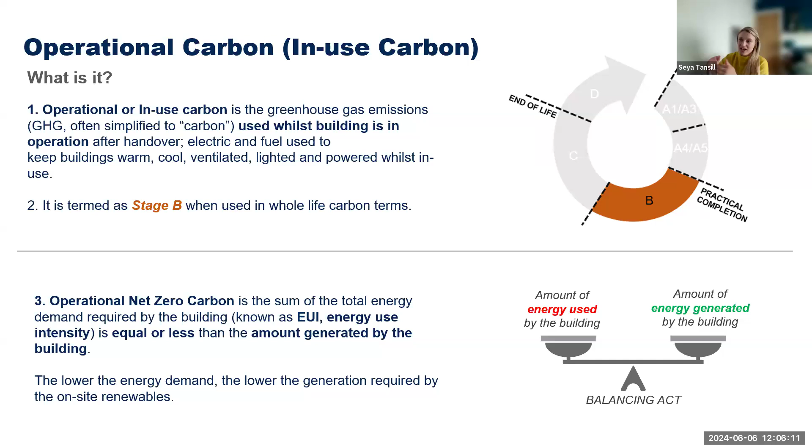So to start with, just to align terminology through the presentation so you understand where we are. As a reminder, operational carbon is everything, all the energy essentially that is used to fuel your home. When we talk around that from a whole life carbon perspective, that is described as stage B. That's exactly the same thing. And then just for absolute clarity, operational carbon is not a net zero carbon criteria. So operational net zero carbon is the balance of the energy used against the amount of energy generated by the building to reach the 0 point. And the different things which, again, I'll come on to.

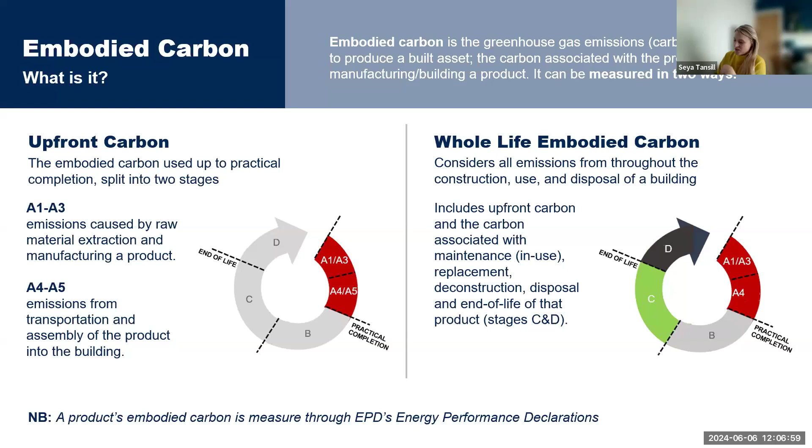Embodied carbon, which I will touch on at the end of this presentation, but as I understand in housing, it's not as predominant as it is in other sectors. But just for clarity of terminology, again, upfront carbon or embodied carbon is from raw extraction of the material right at the end to practical completion when a contractor hands over the building to yourselves. And from a whole life carbon perspective, there's stages C and D. C is the amount of energy used during the building's lifespan to replace and maintain products. And D is a circularity perspective. So is it recyclable? Does it get reused? So just a reminder on those.

To kick off, when you ask for an operational net zero carbon building, that could mean a number of things. Surprisingly, there is no consistent definition of what net zero carbon is. When I worked at BRE at that point in time, there were 9 different definitions out there that you could use for specification. So just putting operational net zero carbon into your briefs is not enough to really define what you're going to get as an outcome. So the first thing to do is decide what definition of net zero carbon we're going to use.

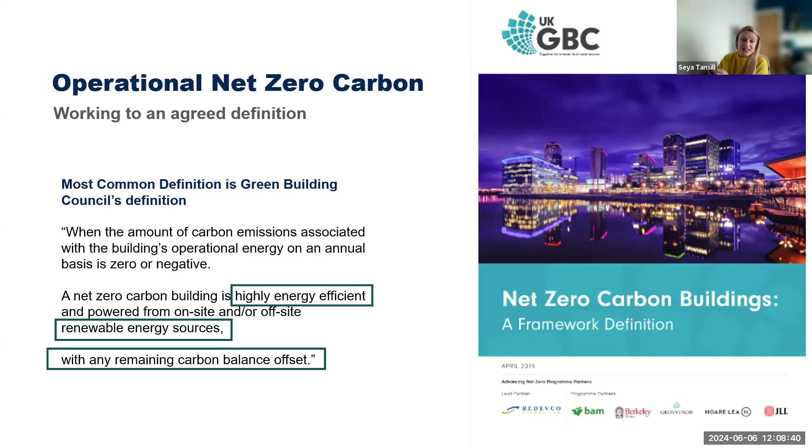What is a renewable energy resource, and offsetting and carbon balance, is also quite a contentious issue in the industry. So touching on those points in more detail as definition watch points would be really good to elaborate when you're setting your ER requirement for net zero carbon.

Highly energy efficient, I would presume that's fabric first. Surely that's fabric first with an efficient service design after it, because that's what the industry has been banging on about for a long time. However, with the development of grid decarbonisation and schemes - I won't name them - certain energy providers offer schemes where they will just offset all the energy with green energy from the grid, so that isn't necessarily taken for granted anymore.

So by referring to the Green Building Council's definition, you do inherently say that you're looking for a fabric first approach, because lower down in that document it provides a hierarchy of fabric first, services, renewable technology, and then offsetting. But to be absolutely clear, I would certainly prescribe how you want the highly energy efficient part of that definition to be achieved.

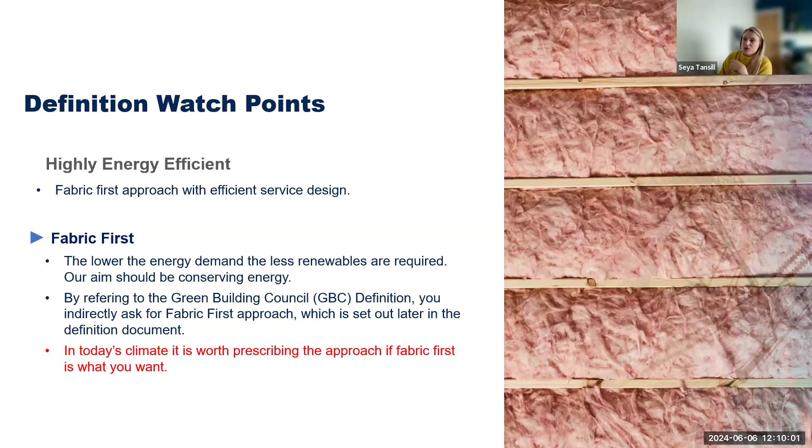Watch point number 2 is the renewable energy sources. As a company, it's definitely worth a discussion of how you want to treat grid decarbonisation moving forward, because this is going to get more and more of a contentious issue as more of the grid gets decarbonised. However, at the current point, I think we're about 40% decarbonised by the BEIS figures.

So technically 40% of the energy coming into any home is sourced from renewable energy. Do you want to capture that as part of the definition, to say that only 60% of the energy used needs to be balanced out with renewable energy sources to get us to zero? Or do you want to make them do the full 100%? That's only something your company can really decide on.

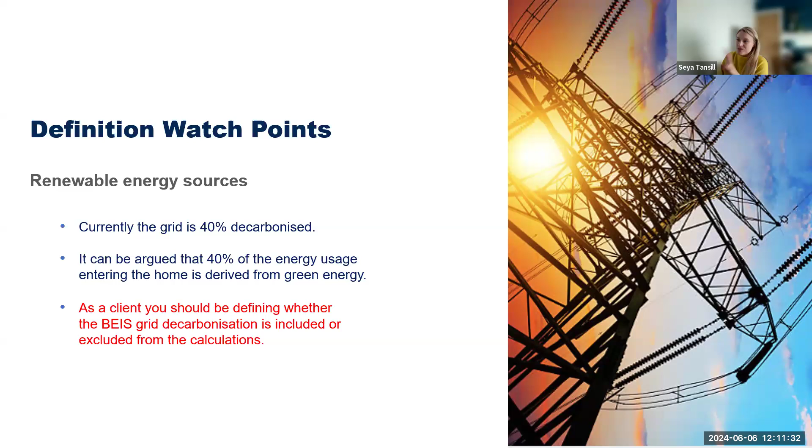As that gets a higher value, you'd probably have to look at that specification again. But without putting that into your employer's requirements as a specification, someone could potentially use that and get a 40% advantage on their calculations over someone else, meaning you're not getting a like-for-like comparison between your projects. So clarity on that is really important.

Offsetting, again, is a similar watch point to what I previously said. It has to be a company discussion and decision of how you want to treat it. The DFE, as a public sector body, and the DIO, and basically the public sector, have said that they want to use the Green Building Council's definition of net zero carbon, but without the ability to offset.

It's an easy out really for a lot of contractors. Carbon credits are cheap. Unverified carbon credits are even cheaper, and it's easier for them to offset at the moment than it is to actually provide you a net zero carbon building at handover, which is sad, and it also doesn't cover carbon in perpetuity, so it's a one-off payment essentially. Again, something you need to think about, but you certainly need to write into your definition if you don't want the majority of the energy being bought through offsets, then it needs to be clarified in the employer's requirements.

The other really key point is specifying that you want to have an operational net zero carbon building at handover. And this goes back to the grid decarbonisation factor. So if you don't specify at handover, an argument could be made towards the roadmap of grid decarbonisation to get you to net zero carbon at a point in time, which might be fine for your needs of your project. But if you don't want that, please make sure you put 'at handover' in your employer's requirements or in your net zero carbon definition.

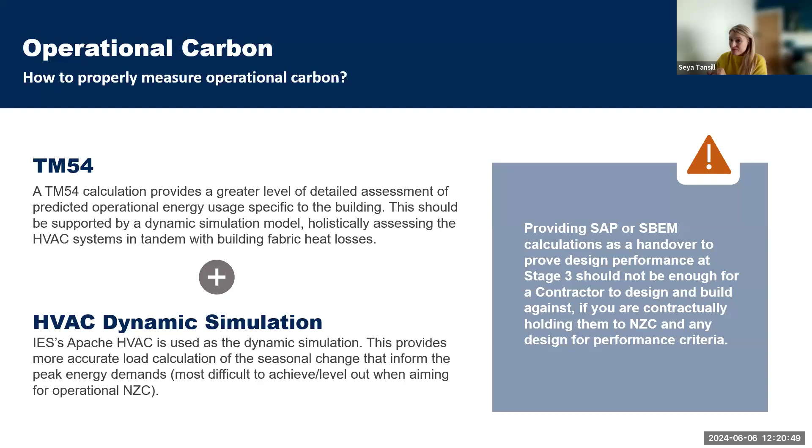That's a saving from a cost perspective, but a massive saving from a carbon perspective as well. So if you have a really conscientious contractor who wants to provide you with a net zero carbon home, and you hand them over a SAP or an SBEM for a large building at tender stage, they shouldn't really be accepting that. They can accept it, but they need to be doing the TM54 and the HVAC calculation with it. I realise it's the industry norm at the moment, but that doesn't mean it is accurate.

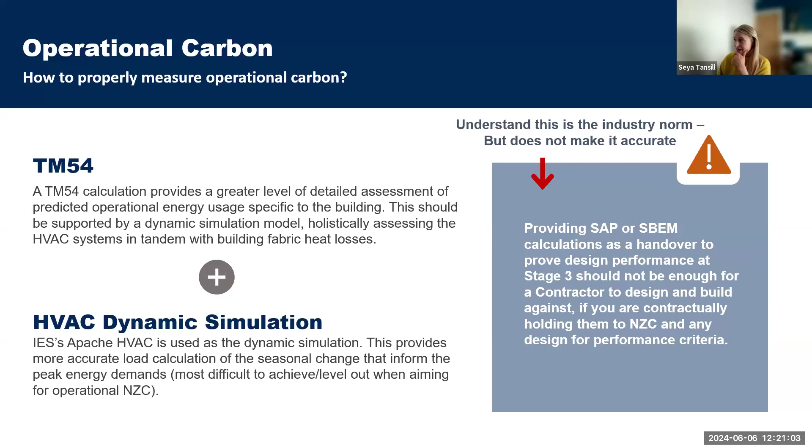No one wants to hear it, but it's the reality of where we are. Okay, and just building on that, I think net zero carbon at handover is perfectly plausible, and everyone should be able to deliver you that as a client need. As soon as we start talking about can you provide us net zero carbon targets after handover, this is where we get into, I think, quite an exciting space around data and IoT, and being able to measure what the building is actually doing in use.

We've got 1,000 data points in our schools, which feed back all of the information around how the building is used. And that's to protect us, because we're held to net zero carbon requirements post handover, but we need to prove that actually someone was in that room 24 hours a day with that window open. And therefore that's why the net zero carbon metering is skewed.

So it's there to protect ourselves, but it should be used more as a preventative aspect to say, yep, we've got known benchmarks, we've got a standard data framework, and actually it will be no problem for us to provide you net zero carbon in use, because we know that we've got the monitoring process to be able to do it. The industry isn't there yet.

But I think the likes of Building Better and other players are also looking into the space of how do we standardize that framework to enable us to look at net zero carbon post handover as a contractual requirement. At this point in time, I don't think we're there.

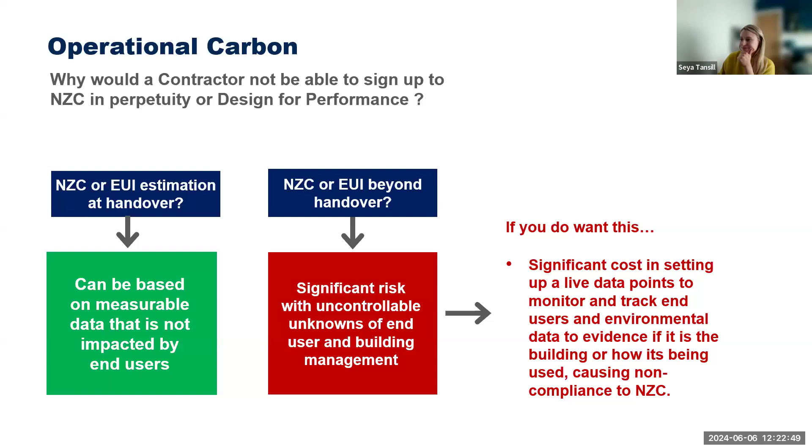So I'm just going to quickly touch on this tender to handover documentation that we've always provided the same level of detail on for us to then move into construction phase. I think where we have been up to now probably doesn't give us enough detail for us to provide a proper net zero carbon brief and a proper net zero carbon outcome. Reason being, unfortunately, is because of technical support, and I think accuracy of measurement and data.

So when we started looking at this, we thought our U-values were down at 0.18. So we had a SAP calc given to us, which had 0.18 written in it, a build-up detail, and a SAP calc from Kingspan or Rockwool, whoever it was at the time.

When we then actually started properly calculating that panel, we were up at 0.31 by the time you put in all the double studs, the studs around the windows, etc., which was a 40% difference in performance. That heat would have had to be replaced by our boilers in use, and therefore you start to see where the performance gap is.

So verification on the fabric design, early stage, either done by the contractor or time given to the contractor to do that verification at tender, or by the design teams up front, is really important to make sure you're getting the outcomes you need.

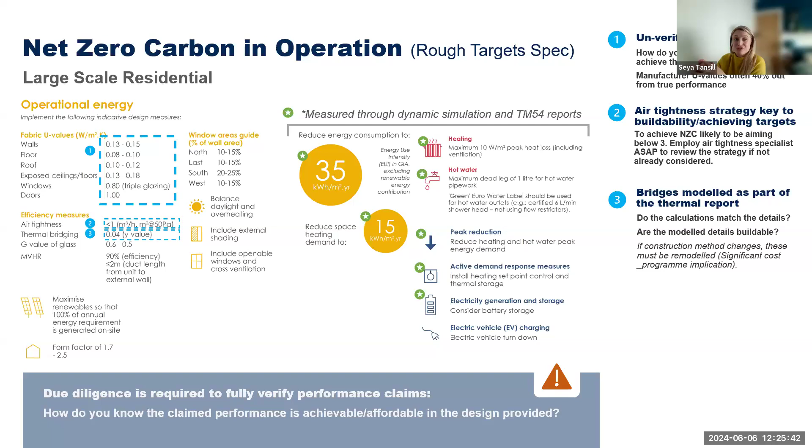contractor to do that, to be able to actually understand how much heat is lost through thermal bridging. Again, it accounts for between 30 and 40% of the building's heat loss. So really important to make sure that's done up front. And if they want to swap the construction methodology, they need to be doing those all again, which is why they probably wouldn't want to.

The last two are just around ventilation strategies and PV generation, which could be picked up with the TM54 in SAP and SBEM. They're not as sensitively calculated, I suppose. So the types of MVHR units down for a 1 or a 0.6 air tightness probably need a bit of vetting in terms of the higher efficiency units are much more expensive and probably aren't picked up in SAP, as you can't really use these for lower air tightness. So just some watch points around that. Again, your SAP assessor should be providing you with that information, but some might not have the experience.

And PV generation, again, needs to be part of the early design package, because that's your balancing act in the majority of times. To get to your net zero carbon, you need to make sure that the panels being used are suitable to do that offset without getting blankets of PV everywhere, which is just not what we want from a future embodied carbon perspective.

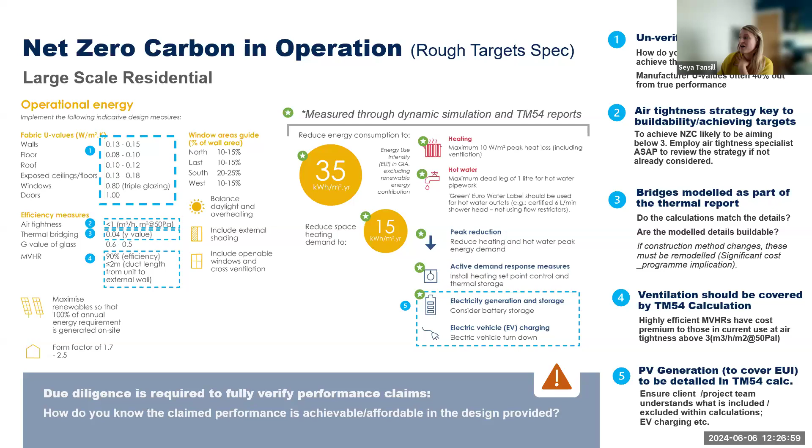Okay, so touching really quickly at the end on embodied carbon. I know it's not a focus at the moment from a housing perspective, but it's certainly on people's horizons. So how do you know what's being measured? Again, there is no common definition of how embodied carbon should be measured. There's a CIBSE and the BS standard, but it doesn't go into what level of detail you need.

And it's really important for clients to make sure they're defining exactly what they want, so that in 10 years' time, we're still not in this position now where we can't draw commonality or consistency of data, because everything's been measured differently, or we don't know how it's been measured, and therefore it's just apples and pears. We can't get to a common base point or benchmark.

So the first thing to watch, which is surprising, is that all the LCA tools for embodied carbon look at different carbon databases. So a product in one database could have a completely different carbon value to that of another database. So when you are specifying measurement, you need to say, I want you to either use this tool or this carbon database, so you've got apples with apples every time.

What do you want measured? So just saying I want everything measured isn't particularly useful, and just enables gaps in the data, because you never really get a breakdown of what's measured in the overall reports that come from the consultants. So it's much better for that to be broken down per package for what you want. So cladding, structures, externals, which includes fencing, drainage and the infrastructure around it. So breaking that down for clarity is much more useful, and you will be able to make sure that you have consistency of measurement across your buildings.